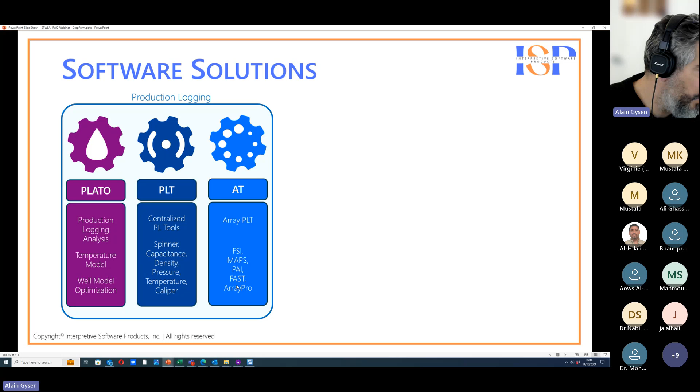For FAST, we have several services to make it easier to interpret FAST data, to allow combinations of their V2 and V4, their slim FAST. So for FAST, we have done a lot of work to be very compatible with their tools to allow different combinations of tools. And we are currently adding more tools from other vendors, but this is for the array tools.

Then for fiber optics, there is PLATO DTS. PLATO DTS is a package that allows you to calculate production profiles using distributed temperature sensing data. So this is a complete module to handle fiber optical data. We have models for warmback analysis, that is analysis where you try to infer the injection profile from shut-in data after the injection. We also have specific models for hydraulic fracturing, both for warmback and for flowing wells.

And then for DAS, DAS for a long time has been a separate package, more like a visualizer, so that DAS data can be visualized together with DTS data. But now this DAS module has been integrated in PLATO. And I will talk a little bit more about that in a little while.

And then another software package is SP2S. This is something that falls outside of PLATO. SP2S is a software that we created to do pre-processing of DAS data, because DAS data is typically of a very large size. You have several terabytes of data, and this is not data that you can easily share over the web or amongst your colleagues. It's not practical to work with several terabytes of data.

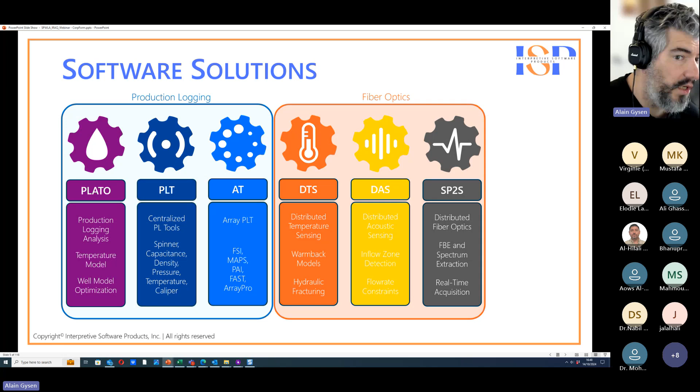And then we have another package, Resolver, that's for formation evaluation. And this is not the package that is the most popular amongst our customers. Most customers are using PLATO.

And as you saw appearing when I clicked on the button, in PLATO 8 we are integrating PLT, DTS, and DAS in the same analysis package. So if you have DAS, DTS, and PLT data acquired for the same well, you can import everything in the same project and analyze all the data sets within the same project. So in fact, you integrate all the information you can obtain from various sources until you have your final result, and then you can confirm that your results are accurate because you have all these sources of data.

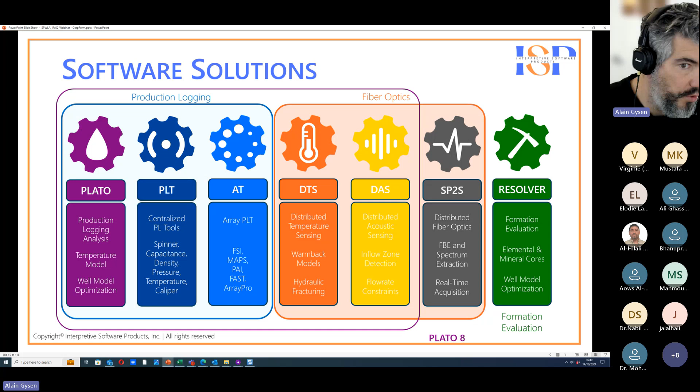Yes, so all of our flow allocation programs, that's PLATO DTS, PLATO array tools, and PLATO conventional tools, they're based on a probabilistic principle. So what we do is we optimize a well model by using a probabilistic technique. So the probabilistic technique works as such that you have a model of the well, and this model of the well allows to generate theoretical curves.

In this particular case, you have a theoretical density, a theoretical capacitance, a theoretical velocity, temperature, pressure gradient, and these theoretical curves are compared to the actual data. And comparing the measured data and the theoretical data allows to generate an incoherence curve, or just an incoherence function, in fact, which is, we use the chi-square error function. You can see the function right here. It's a published incoherence function.

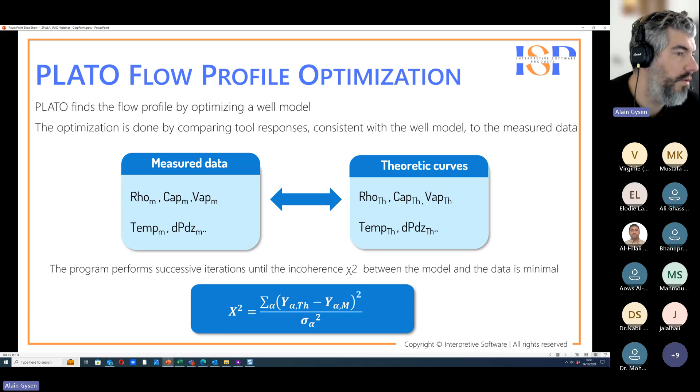It is summation over all the tools and all the samples of the squared difference between the theoretical measurement and the actual data, divided by the uncertainty on the measurement to the power of 2, so the squared uncertainty on the measurement, and this uncertainty is calculated during the pre-processing subtask in PLATO. So what we do is we are optimizing a well model by minimizing the incoherence between the model and the data. And you will see that on the next slide.

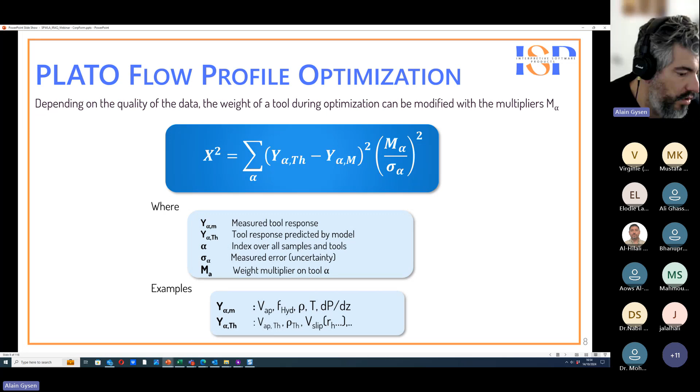Then, of course, not all the data will be of the same quality, and maybe there will be zones where a particular tool failed. Therefore, we are slightly modifying this incoherence function by introducing a weight multiplier, M. So for each measurement, there is a weight multiplier, and this will influence the weight of this particular measurement on the optimization. It will be very clear on the next slide.

So if you would have had array data that completely covers the production casing, then you would have enough data to quantify the amount of hydrocarbon moving up at the higher side. But in this particular case, you don't have this. So what we tried in this dataset is to reduce the weight on all the conventional tools in the water recirculation zones and activate the temperature constraint in this recirculation zone. I'm not saying that this is the solution every time you have this water recirculation, but in this case, it worked very well.

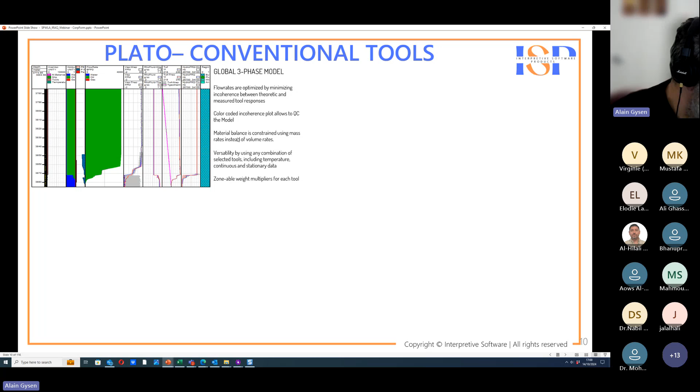Then for the spinner processing, we are also using more of a probabilistic approach, and that means that we are calibrating the slope, the threshold, and the velocity by generating theoretical curves for each spinner pass. So for each spinner pass, a theoretical RPS curve is calculated using the slope, the threshold, and the theoretical apparent velocity. And you will see in the example that the program also minimizes this incoherence. You have the incoherence track. So the apparent velocity, slope and threshold obtained are in agreement with all the data.

Of course, with spinner data, you have many cases where in some intervals the spinner data is of poor quality, and some passes fail completely. So we have quality flag parameters so that you can manually remove the bad spinner data, so that you obtain an apparent velocity curve that's in agreement with all the data, and you remove the data that is not reliable. So here is a result of such an optimization. We have a good match between theoretical and measured curves.

We are not using linear regression, but to make this a little bit more intuitive, we are also adding station plots at a particular depth where we show the spinner data versus cable speed and also the linear fit. And this additional curve is the final QC curve that is showing the RPS data versus the relative speed between the fluid and the cable. That means that this is some kind of shift we apply to the static response.

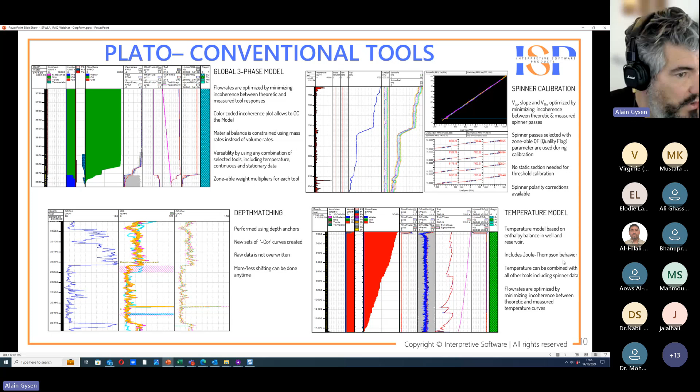Then for temperature analysis, yes, we have a model based on the enthalpy balance in the well and the reservoir. This model includes Joule-Thomson behavior. The temperature model can be combined with all other tools, including spinner data, and the flow rates are optimized by minimizing the incoherence between the theoretical and the measured temperature.

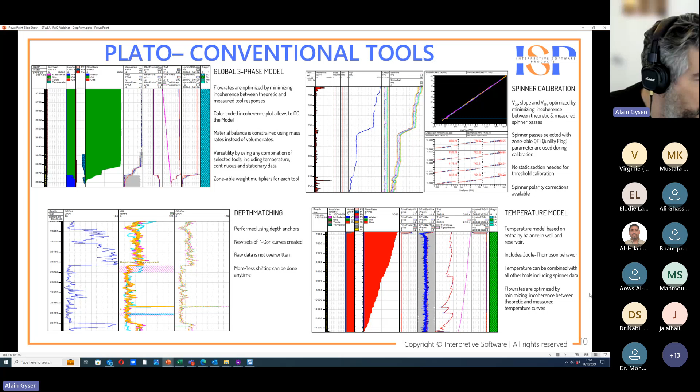What you see here, this is data acquired in a horizontal fractured well, tight gas, and you can clearly see that there is Joule-Thomson cooling at every fluid entry. The red curve is the theoretical temperature, the blue curve is the measured temperature. So the profile here has been obtained by optimizing the temperature model, and doing so we optimize the production profile. So we have a very good match between the measured and theoretical temperature.

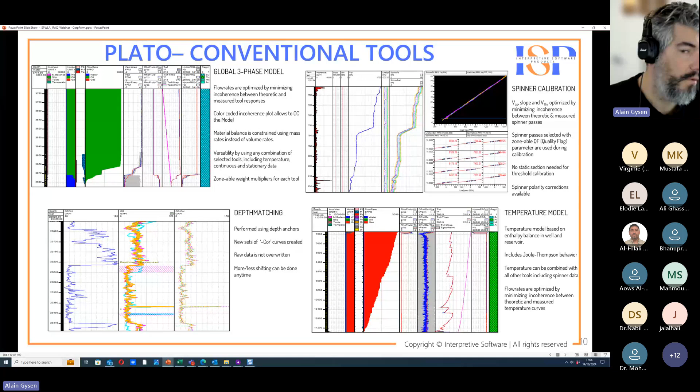Okay, so the temperature model, it's a very complete model. We have different possibilities for geothermal. All the parameters that have an effect on the temperature are included in the model.

Then a few examples to show the versatility of this probabilistic approach. Here, this is a gas and water producer. Schlumberger tools, you can see we are using velocity, pressure gradient, the gradiomanometer density, the DEFT, the GHOST, and some stationary measurements. So here we are using all the acquired holdup data for the optimization of the well model. And for the spinners, we include the continuous spinner data, but also the local stationary averages of the spinner data.

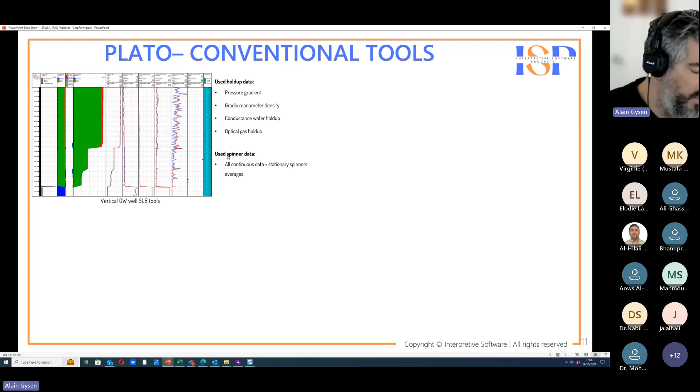Then another example, this is a vertical well. It's also fractured wells, and in these fractured wells, there was a lot of slugging occurring. You can see here the velocity data is not of the greatest quality. In the tool string, there was a gradio and of course pressure. But what we noticed is that the temperature is a lot more sensitive here in these cases.

All of the slugging makes it impossible to really identify or to quantify how much is being produced from one perforation. But the temperature gradient in this track is spiking at every fluid entry. So for this customer, we helped them to build the template or the processing approach for this type of data. And this was an approach that included also the temperature and the Joule-Thomson cooling resulting from the gas production.

So here, after this customer implemented PLATO, they finally had a good handling also of the water entries, because the water entries were very, very small. And once they added temperature to the model, they got the proper allocation of the water production.

Then, yes, you can use a limited data set, just velocity, pressure gradient, and gradio. Here, everything is showing a single phase gas, and the spinner data, or the apparent velocity at least, is showing cross flow during shut-in. So fluids are being produced in the upper sands, they are flowing down and then injected in the lower sands. So this is cross flow in a 40% deviation well.

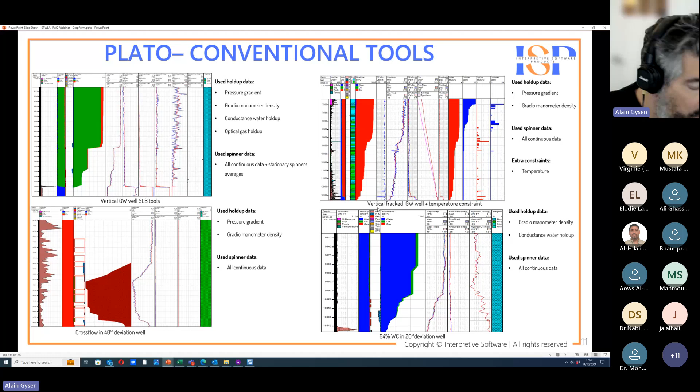I will quickly go over the other software we have because we only have one session now. So for PLATO array tools, we use the same approach. So with the calibration of the array tools, we mean calculating the layered profiles, so layered velocity profile, as you can see here, the layered holdup profile, as you see here. And these layered profiles are calculated and calibrated, especially for the spinners or for other tools that need calibration, by using this probabilistic approach.

So we are generating theoretical curves for each pass for each sensor, and PLATO is minimizing the incoherence between both. So of course this involves a lot more work than conventional tools. You have to look at all of these different array tools. As you are aware, there are currently some collocated tools that are very flexible so that you can use different combinations of probes, but therefore PLATO has to be very versatile, and also you have so much more data to look at. So you have to look at every probe. You have to check for every pass for every probe whether you can use it for the processing.

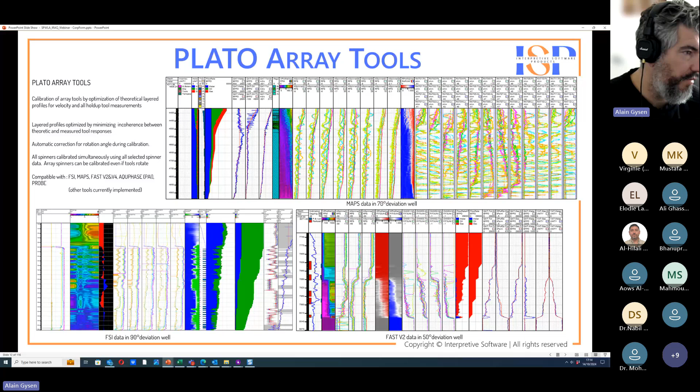So yes, for all the interpretations we do for array tools, we are using the same model. We don't have to use another model for a different tool. So for us, an array tool is just a tool that we use to update our layered models. Therefore, we are capable of implementing new tools very quickly because what the tools do is provide us information to optimize the models.

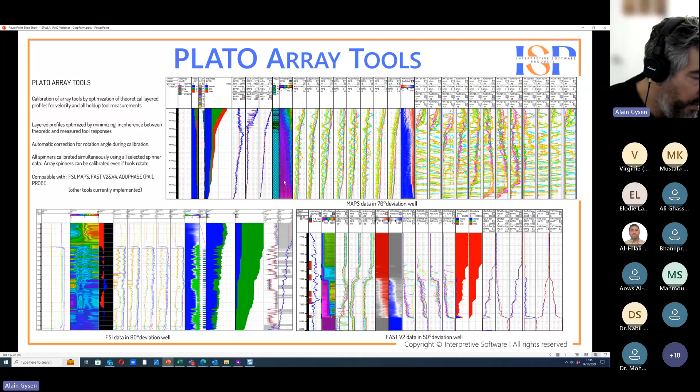We don't have to change the model depending on the tool type. Of course you have to implement the tool type, the relative positions between the probes and the technology, but the profiles are optimized. The profile optimization is done by using the acquired data.

Okay, then how much time do I have? Okay, still, okay, so maybe I should go to the PLATO projects now.

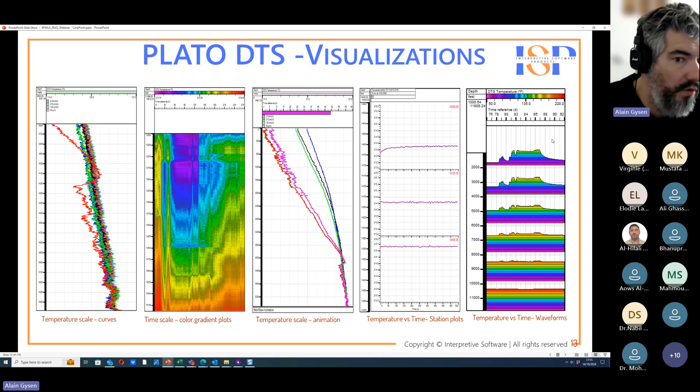So PLATO DTS, we have all the different visualization types: color, curves, color maps. We have animation mode. You can look at the temperature versus time at particular depths, waveform visualization, and also for PLATO DTS, we can obtain results with the temperature, and if pressure data is available, of course, it helps to differentiate in between phases.

For DTS, this is exclusive to DTS: it's the Warmback model. We have a model for fracs, to analyze the Warmback data, the flowback data after fracking, but also for open hole laterals we can analyze the Warmback data. So we have two models for Warmback analysis for DTS data, for fracs and horizontal laterals.

And what we do is PLATO is generating theoretical temperature history, shut-in traces, and these shut-in traces are generated from the injection profile. So by minimizing the incoherence between the shut-in history, measured and theoretical, we optimize the injection profile.

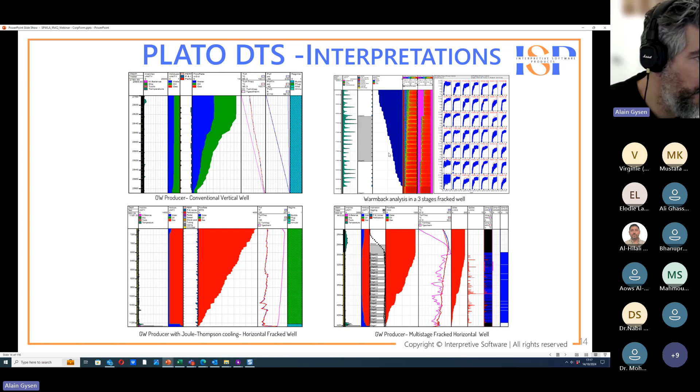Okay, so I think I have to speed up a little bit.

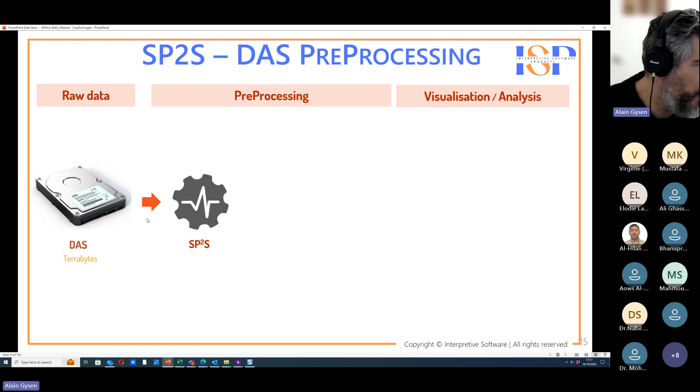Yes, then just for the DAS, what we do for DAS. Typically the raw data for DAS is in the terabytes. One job may consist of a box of 5 hard drives that are completely full, and of course that's not very practical to work with. So our first step in the workflow is SP2S, the pre-processing software, which is decimating the data so that you have one file per timestamp.

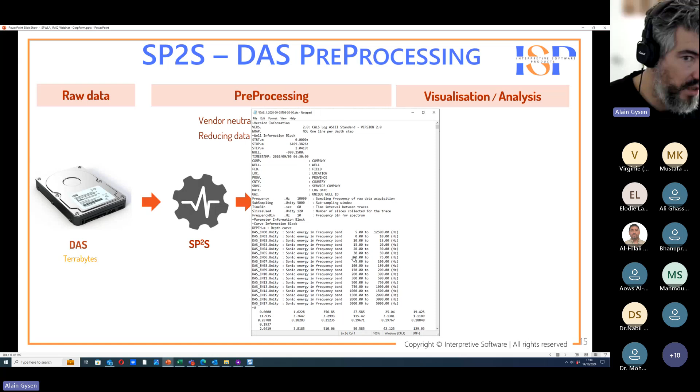So when SP2S is running on your raw data, ASCII files with the timestamp in the file name are generated, and each of these files contains the timestamp, so time and date, and the DAS energy for 18 frequency bands. These are frequency bands that the user can change. So you would select frequency bands where you expect fluid movement to occur, or if you have another purpose, you would select frequency bands where your event would be visible.

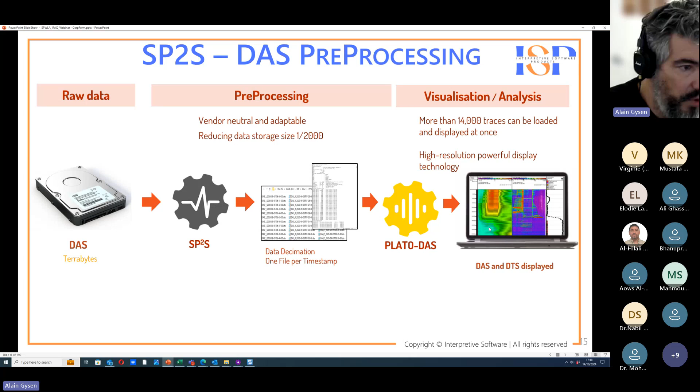Then the decimated data can be imported into PLATO DAS and visualized together with DTS data. For the visualization, we are currently displaying 6 frequency bands, and the frequency bands can be synchronized if we do a time zoom or a depth zoom. So these are functionalities in PLATO DTS, PLATO DAS.

So yes, to repeat it here, these diagonal lines show fluid movement. You can see them typically in the lower frequency bands. In the higher frequency bands, you may see completion items making noise when the choke settings are changed or when injection or production is occurring.

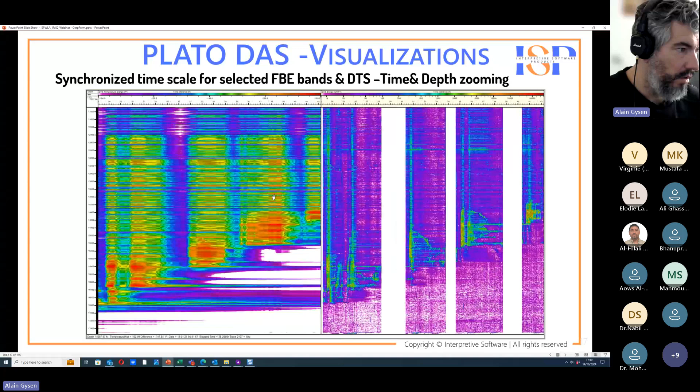Then we can do time synchronization of DTS and DAS data. Here you can see the DTS data during a fracking job and the DAS data also during a fracking job, and they are time synchronized. So you can see at what depth and what time a particular event is occurring. So this is all for fiber optics.

And then before I start the example, for our new release, PLATO 8, that is coming out this month, we have included some processing of the DAS to assist with the production log analysis or the flow allocation.

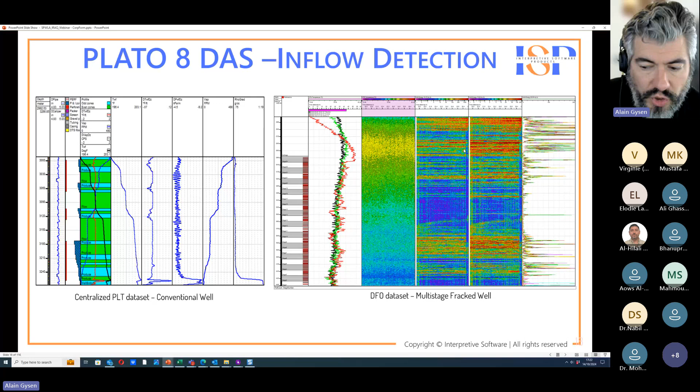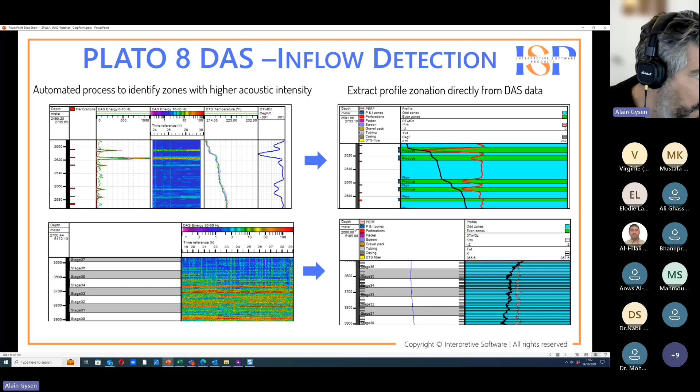So what we have implemented is some kind of automation to extract potential production zones from the DAS data. These production zones here, where the DAS is showing a high intensity, can automatically be detected using our algorithm. And this is the last slide before the example. So for different frequency bands, we calculate the total DAS energy over a time where there is steady state flow, and then we can specify thresholds.

A threshold to determine whether a particular energy corresponds to production or not, and we can put 2 thresholds, one for high production and one for lower production. And eventually, when we want to do some more automation to label zones as potential production zones, we can now include the temperature gradient, the profile from the DAS, and the perforations.

So you have this dialog now where you can specify the sources: manual input, perforations, DAS intensity, pressure, temperature gradient. And you can make it so that production zones are only selected if production is shown by every measurement, by the DAS, the temperature gradient, and it also has to be a perforated interval. So this is to improve automation. Of course, a lot of interpretation still must be done by the analyst, carefully specifying production profiles and production zones. Okay, so those were a lot of slides.

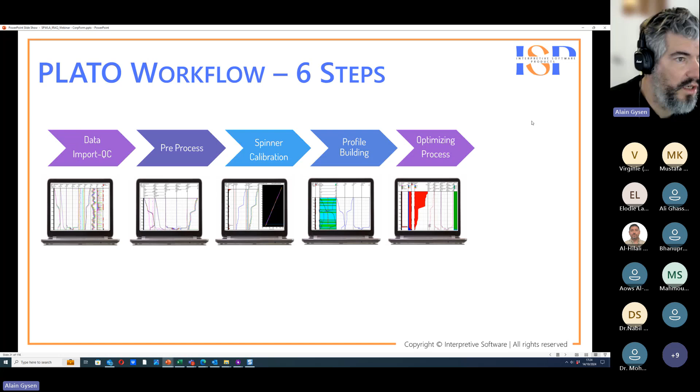Let me go to the PLATO workflow. The PLATO workflow for standard PLT consists of 6 steps: first, data import and QC, pre-processing, spinner calibration, profile building, the optimization process, and eventually calculating the surface rates from the optimized downhole production profile.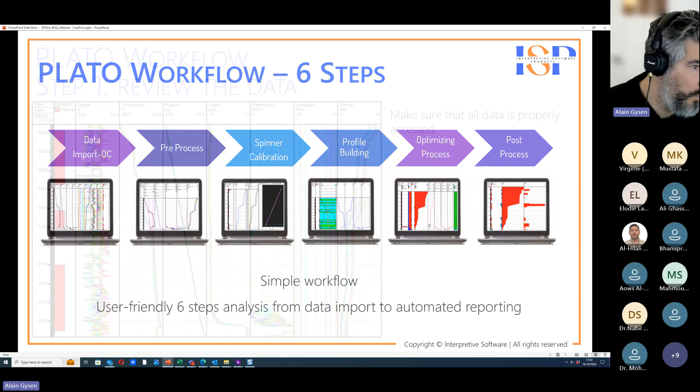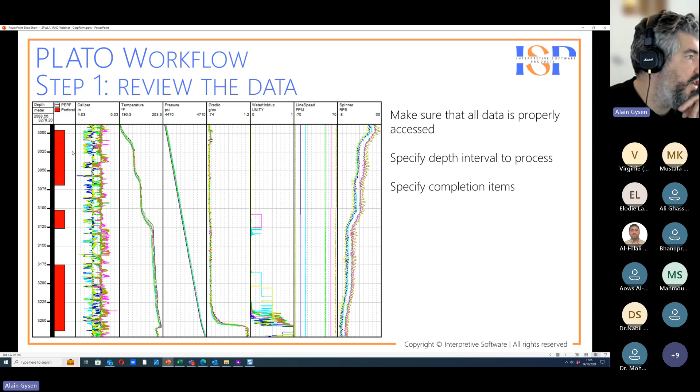Let me go to the first step. In fact, it is reviewing the data. I will open PLATO to show you how it's done. Reviewing the data is typically making sure that all the important data can be accessed and visualized. You can change the processed interval. Typically, you have some poor data above or below the logged interval, so you reduce the interval to where you have good data. You can specify some completion items, perforations in this case, and perform depth matching if needed.

Let me go and create the PLATO project. The current approach to generate a PLATO project is you create a project like this. This opens a window. In this window, you type the project name. So I can call this SPWLA webinar September 2024. Then the analyst name, it's my name. Of course, if you install PLATO, it will be your name.

You press next, then project path. I'm not going to spend too much time on that. That is where you are saving the files for the project. So we have these three little dots here. If you click on this, you can specify the folder where you want to save the PLATO project files.

Then there is import files. You generate the PLATO project using the imported data, typically LAS data. To import data, you click here on this little plus, and then you can browse through your files and select the data you want to use. For this analysis, I will see how much time I have, but I will start with the flowing data. This is a file containing all of the passes for this job, flowing data.las.

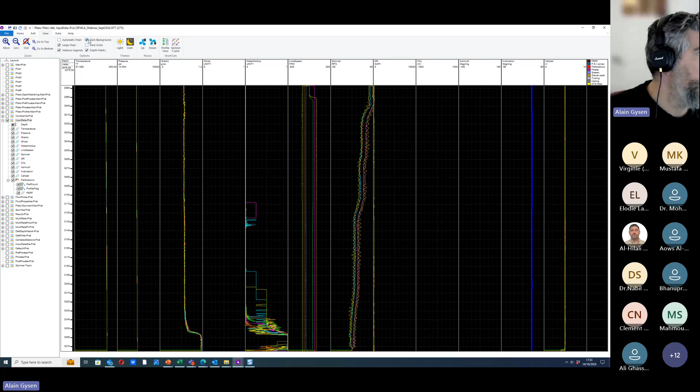In the View tab, of course, there are zooming options, but you can also, for example, if you are more accustomed to dark backgrounds, just click dark backgrounds, and then the backgrounds are black. It's very easy to do. You can hide up and down passes. So this is a ribbon structure that we are using very much like any other software, I assume. Then there is the browser tree, and in the browser tree, you can see which image is currently visualized, and also for this image, which tracks are currently visible.

We can see here there is no ghost data, so we can hide the ghost data. So if we uncheck ghost, it's disappeared. The gamma ray, yes, there is gamma ray, but no azimuth data, so we can hide the azimuth data. So you can use this to hide specific tracks that you are not going to use, or to bring them back.

What you will notice is that the scales are not appropriate for this tool set yet. The scales are too wide so that you cannot really see the data well. Therefore, we have an automatic scaling implemented. It's called rescale. If you click the rescale button, all the minimum and maximum scales are set appropriately to the minimal value on the data and a maximal value on the data.

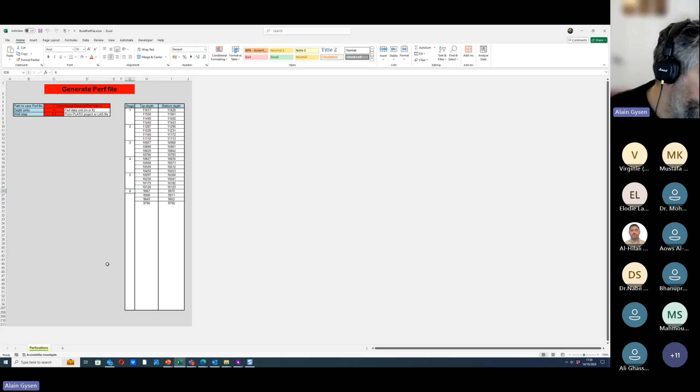Of course, if you have 3 perforations, it's a bit like overkill. Everybody can manually enter 3 perforations. But if you have like 100 perforations or even 40, you really don't want to enter them manually. So then this macro-enabled Excel file is very handy. But we will import the perforations using wellinfo.par. In V8, it's very easy, you can use drag and drop to import those parameter files. In this version, we have to go to the data tab, then to parameters, browse to the correct location, wellinfo. And you can see that now the perforations are displayed.

Okay, so I'll trim the process interval, making sure that I am not cutting away data that's across the producing interval. So I change my top process zone here by clicking on the global editor, and here there's a zone to process. So I enter 2985 meters, that's where the data is becoming unreliable, down to 3270. Then I evaluate, and now you can see that you have an interval that is containing good data, and you are still including your perforated intervals.

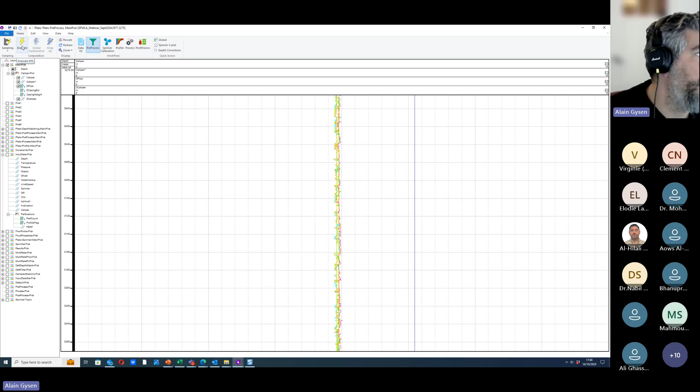Then pre-process is a subtask where you are filtering the data. So you select passes for processing, filter data, calculate error estimates, and you can calculate TVD and the geothermal for temperature analysis. So let's go to pre-process here and press this evaluate button. That's a button that is used in PLATO to start a calculation. So I press evaluate, and then you can see a number of tracks appearing.

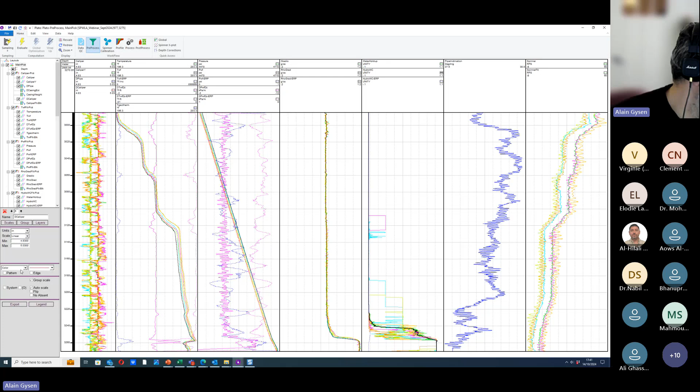In the first track, the caliper data has been used to calculate the pipe ID. So you can see the caliper. If I right click here on the caliper, I can change its appearance. I can make it a thicker line to make it stand out more.

You can see that for temperature, a filtered curve has been calculated, a black curve, and also a temperature gradient. The pink line here has been calculated. For the pressure, a filtered curve and the pressure gradient has been calculated. And a filtered curve for gradient, water holdup, and the spinner data has also been filtered here. And the pipe inclination here was used to calculate a continuous inclination curve.

So what you can do here is you can change the curve that you use for temperature, for example. You can take an average. For temperature, it's the rule of thumb to take the slowest down pass because that's the pass that is most representative of the temperature changes across the wellbore, because you don't have the hysteresis effect and the tool is moving slow, so you're not smearing out your temperature response.

So for temperature, we typically don't average, but for other curves like pressure, you can take an average, and taking an average is done from the screen. You select the curves you want to average over. We had 6 passes here. For gradient, you can also take an average. For the water holdup, it is a little bit more difficult because you see that some data is failing. You have this null data, well, not null data, but this weird behavior. So we are not going to select those passes.

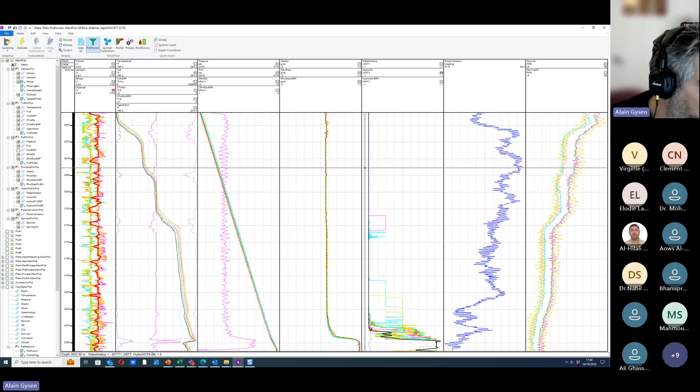Therefore, I right click in the track, I uncheck pass number 1, and then I look for a good pass, and I take the dark orange pass. So I select pass number 4 and recalculate the curve. And now the fluid level is at a better depth, but we have this weird behavior. So what I can do here to avoid this weird behavior is to select the one pass that is going all the way down to the bottom. So I right click there, uncheck pass number 4, check pass number 6, snap to bottom zone, evaluate. So you can see that you can select different passes in different zones for this filtering process.

Then we can already continue to the next subtask. We did some averaging, we filtered curves, we made some modifications. I calculated the pipe ID from the caliper data. Next subtask is the spinner calibration. And as we mentioned before, in PLATO, the spinner calibration is done by comparing theoretical spinner curves to the measured spinner curves. The theoretical spinner curves are generated from the slope, threshold, and the apparent velocity.

I will quickly show this. So if you press global optimization, PLATO will generate in the spinner track additional curves called spinner eval. If I hide spinner filter, toggle between spinner filter and spinner eval, you can see that the match is pretty good. So the theoretical and the measured passes are nicely overlapping.

But something that you observe here is the blue curve. I can highlight the blue curve. The blue curve is curve 7. No, pass 2. If I put the cursor on the curve, it's pass 2. You can see it in the value bar. At this depth, it's suddenly getting an RPS value that is negative and higher than the next two passes. So the curves should behave like tram lines. They should not intersect. They should not cross each other. But here, the blue curve is crossing with other data.

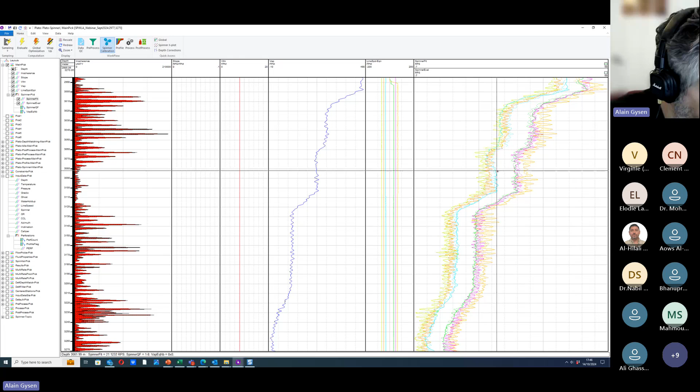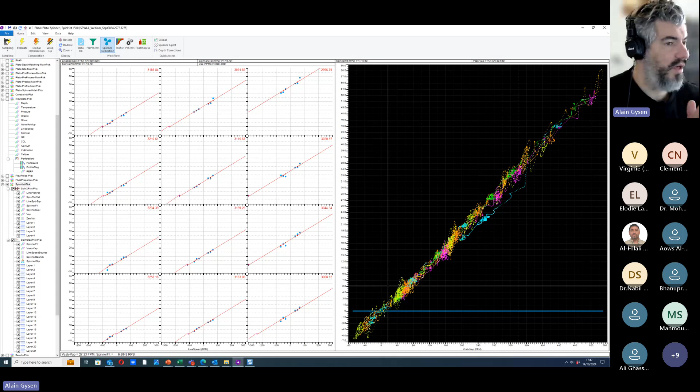And if we look at the spinner X-plot, first rescale, you can see the linear match between the measured and the theoretical spinner data. And also here, this is the plot where we are showing the RPS versus relative speed between the fluid and the cable. So this is in fact the static response. In order to have a very good spinner calibration, all the data should fall on a straight line. And here you can see most data is falling on a straight line, except for this blue data.

So we have a number of options to remove this. We can draw a box around this bad data. So here I can draw a box around this bad data. Save this.

And then the bad data in this box will not be used. Or I go here and I use my quality flag parameter to remove the blue pass in the section where it's not reliable. So for example, here is the depth where the blue curve is starting to merge with other passes. So drag the cursor up until where it's making sense again. So the blue curve is once again at its expected position.

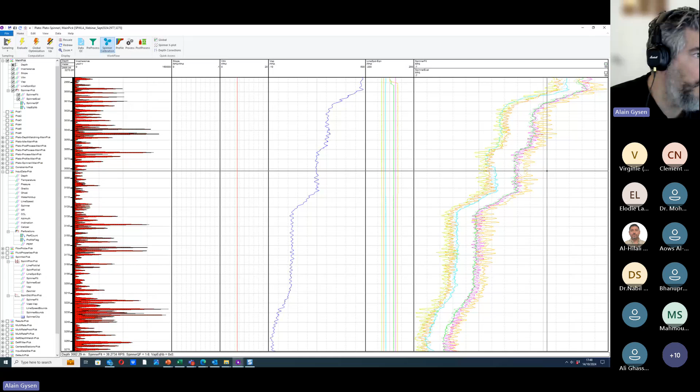So then I select edit spinner Q flag. I can uncheck pass number 2. Then I only want this curve to be deselected in the zone that I manually specified. So freehand zoning. Okay, and then if I do a global optimization, it's no longer going to use the blue curve. So this functionality allows to remove bad spinner data so that in the end you end up with slope and threshold and an apparent velocity that is in agreement with all of your data.

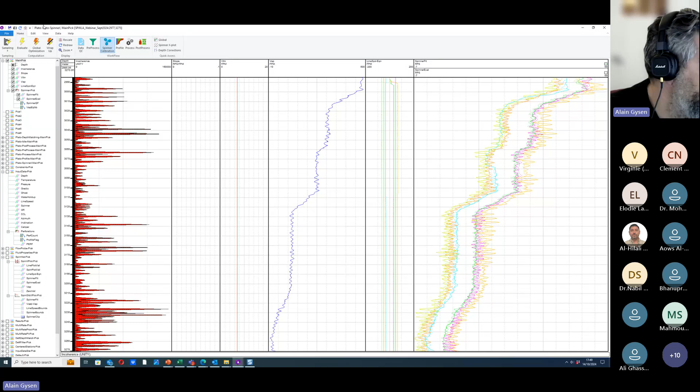Okay, so I'm getting very short in time now. So spinner calibration is finished. We have a reliable apparent velocity. Go to the profile subtask, rescale, and in the profile subtask, the analyst is going to define which zones are potential production zones. And you can do that using the temperature gradient. You can see the clear spikes here. The temperature itself, absolute temperature, and the apparent velocity that is showing increases where production is occurring.

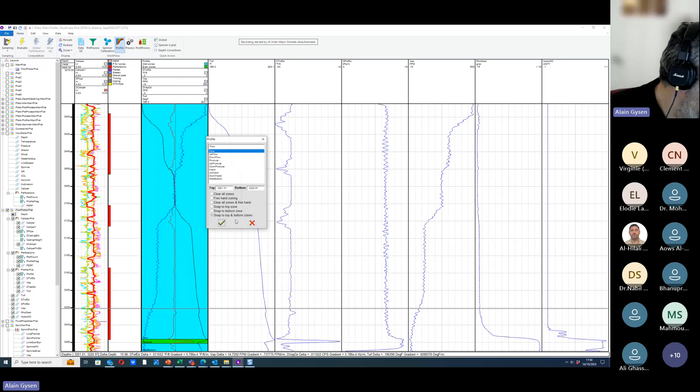So I can make it a very simple model. So first fluid entry is shown by the temperature here. So I mark this first step as a production zone. Then everything above it is flow. And then, yes, let me make it a simple profile. So produce, and here you can see a little bit of frictional heating, temperature spike, and the velocity is also showing a change. So let's make a different zone here.

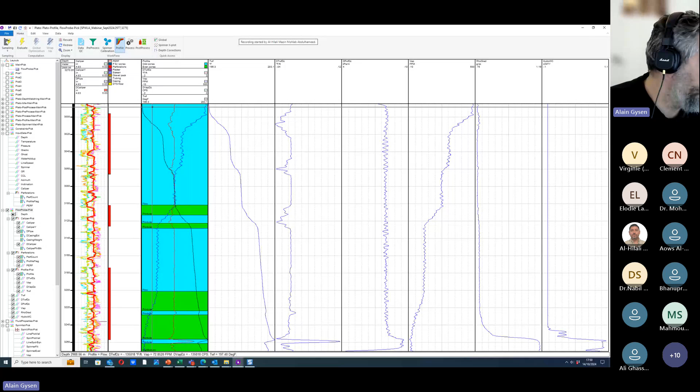And what I'm in fact doing is I'm breaking up the well in potential production zones. And these different production zones are zones where PLATO can calculate a different production rate. So in every zone that I'm labeling here, PLATO will be able to calculate a different production rate. If I select just one big zone, like here, then PLATO can calculate only one rate. But by taking account of the changes you can see on the velocity and the temperature gradient, you can specify zones in such a way that PLATO can calculate different production rates.

Okay, so let's start with this. It's going to be enough for this case. So all those zones are zones where the velocity is changing. Actually, I made a mistake here. Still production here. So I go to the global editor, because I have to enter some PVT information. And in PVT information, I never enter surface rates because I want to see what PLATO calculates without imposing surface rates. So the salinity was 250 in this case.

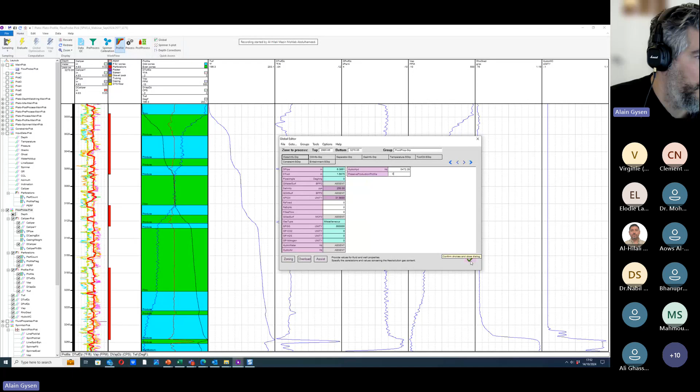The oil API, it is 31.9, and for specific gas gravity, I don't have information. I'm not going to enter any sour gas compositions or BO values, so I'll just start with this. Just the oil API and water salinity. Then I press evaluate to register these potential production zones and do some pre-calculation of PVT properties.

Then I go to the process subtask where the optimization is occurring. So global optimization, click here. You can see after the global optimization, the production profile has been optimized. You can observe a good match between your theoretical and your measured curves for all of the data. But what you notice is that the curves suddenly have become more blocky. That's because a sampling reduction has been done to make the optimization go faster.

In a case like this, it won't make that much difference to do the optimization with all the samples, but in many of the cases that we're working with many perforations and complex situations, it's really helpful to reduce the amount of samples or measurements used in the optimization and gradually increase the amount of measurements you are using until you can use all the measurements. So this is done in the sampling level. You can see automatically PLATO selected level 5, but you can also go to level 10. Then you are going to optimize the production profile using more data. You can see the curves are becoming more continuous. Eventually, you use all samples.

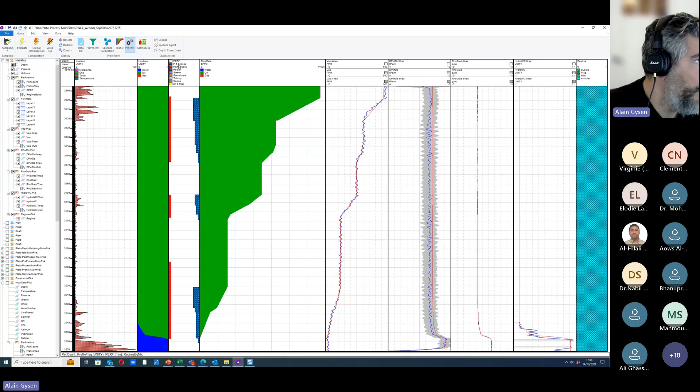And eventually, if all samples are used, you can go to the final subtask, evaluate, and now you have your downhole flow rate and your gas and oil rate at surface conditions. So this is oil, but of course there is gas in solution. So this is the solution gas that's been calculated, and that's the rates you get at surface. For water, there is a ridiculous amount calculated. If you enter any reasonable scales, you will not see water anymore.

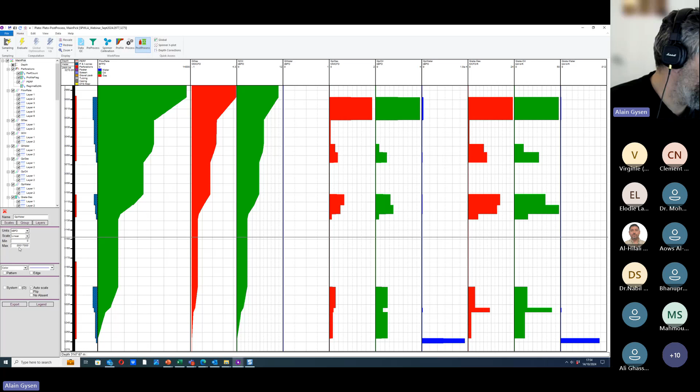So this is a very quick analysis. If I was a bit faster with my first explanations, I could have shown that you could also add the temperature here. Temperature can be added, and you can also import the stations to have these local spinner constraints that are working and showing an agreement between the model and the theory.

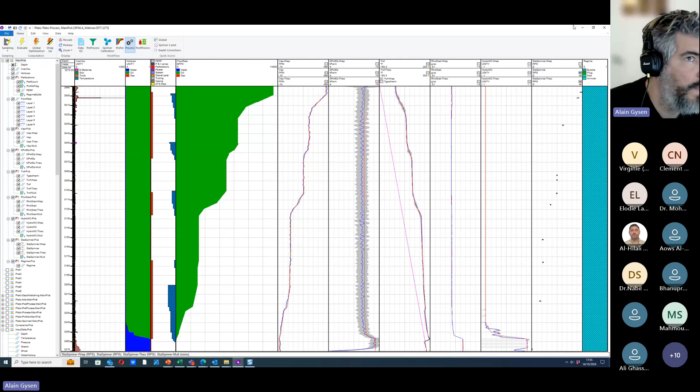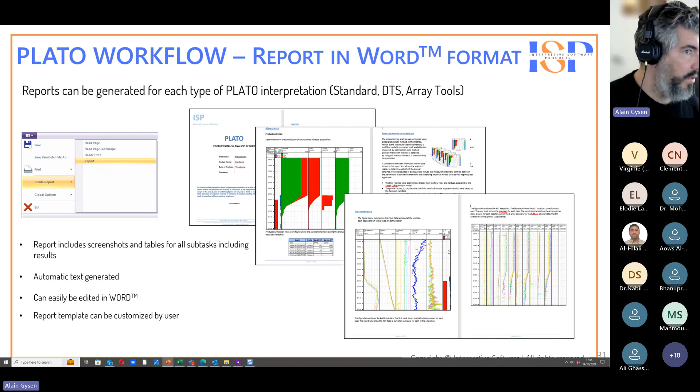Okay, and finally, if this has been done, you can generate a report in the Word format for all the types of measurements that we can analyze in PLATO. So for all the conventional tools, of course, the DTS, and for array tools, for each type of array tool, we have a different report template. Okay, so I'm afraid that I went a bit over time.

I believe you are in time. Okay, perfect. So it's less than 90 minutes. Okay, I'd like to thank you. It was a really informative webinar. And if you have access to the chat box, some people sent some questions. You can see them. I will check, yes. I have a question. Yes, you can jump in, Virginie. Can I ask? Right. Yeah, for sure.

Thank you very much, Alain. It was a really very good presentation and overview of everything you can do with the software. Maybe you can answer this question. You said you could integrate production logging with DAS and DTS, and you also explained for the production logging interpretation the importance of using temperature in the model along with a spinner. Is it possible that you also integrate acoustic data from noise or acoustic sensors like hydrophones? Is that something that you have done with PLATO?

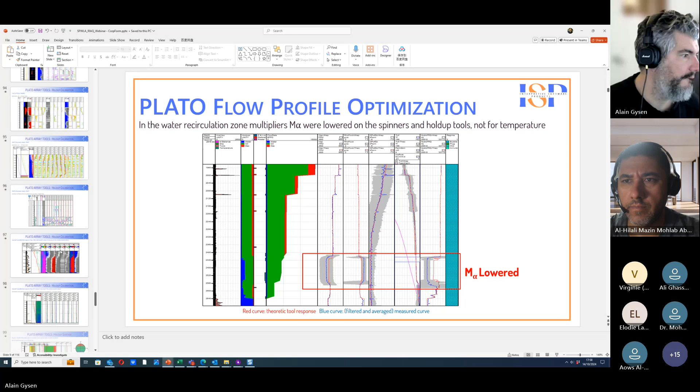Okay. What is FBE? That is frequency band energy. Let's see if I can find some backup slides. So you have DAS data in different frequency bands. FBE is frequency band energy, and this is the energy for the frequency band from 5 to 10 hertz. This is from 10 to 15 hertz, and here you can nicely see fluid moving up on the color maps. That's the FBE.

Okay, you can go to the next question. Okay, no problem.